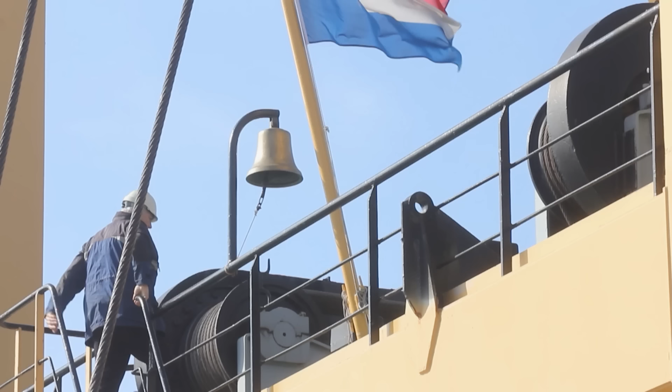Before the van Seumeren brothers could make their bid for the lucrative contract, salvage giant Smit made an offer that President Vladimir Putin could not refuse. Kees van Essen was commercial director at the time. Putin made one promise. I will take the bodies back home before Christmas. So that was the moment to attack. When I came the first time in Russia by Spassky, Spassky told me, sorry Frans, you are too late, because we want to give the job to this consortium.

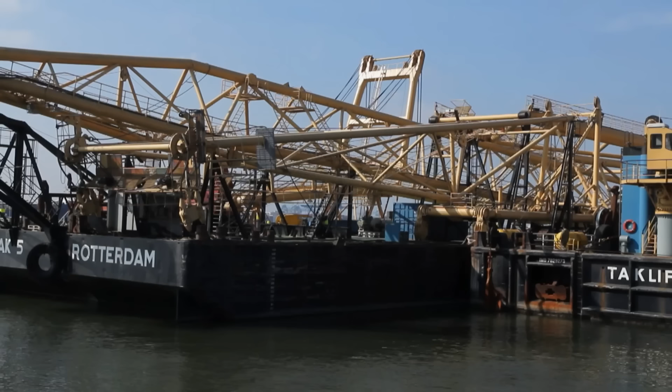This is Rotterdam, the world's largest port city. It is home to Mammoet Heavy Lift Company, at the time owned by the van Seumeren brothers, and to their competitor Smit Salvage, a Dutch ship salvage company. Smit was a step ahead in winning the bid. 10 years before, the Komsomolets went down. That was also a nuclear-powered submarine from the Russian Navy. And our plan was approved, but unfortunately, when that was approved, the Soviet Union collapses. We had a different setup and there was no more budget.

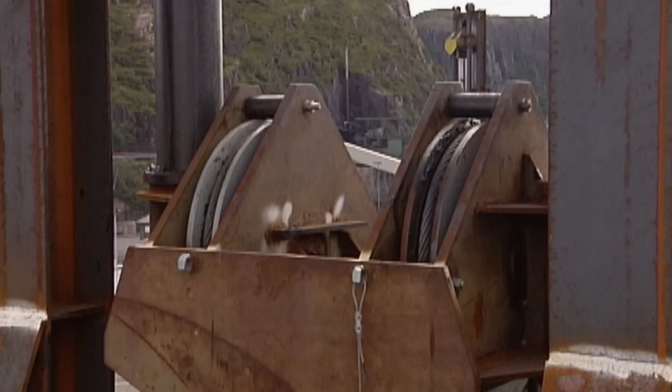The Kursk presented special problems for a salvage operation, and Smit had solutions. The major issue was that the Russians want to have the torpedo room to be cut off. That's where all the trouble started. There was an explosion and it was a big mess down there. It was a nuclear-powered submarine, so they wanted to avoid all possibilities for any vibration in the submarine, because that could have started up the nuclear power plant again without cooling water, and then seriously it could have ended as another Chernobyl. Smit had just developed a unique new system for sawing through steel.

Their expertise opened the doors of St. Petersburg's corridors of power. We had our contacts, of course, with the engineering company, Rubin, in St. Petersburg, and also the head engineer down there was Mr. Spassky. He was also still there, so we had our contacts. And because of our planning for the Komsomolets in the past with Heerema, we approached them as well and see if we could make a new combination.

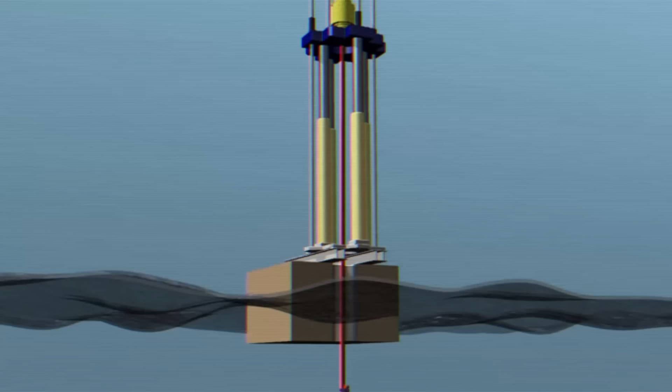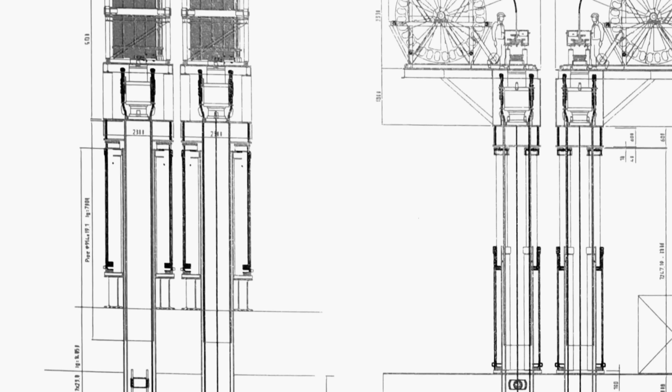Jan van Seumeren, however, had already devised a crucial, unique heave compensation system to handle the Arctic Ocean waves. I got it quickly with those nitrogen cylinders and those reels. I knew how I wanted to do that. And then I went to the pub. It was during the weekend too, and there I was explaining. We often go to the pub together with our staff, and there we were, cozily chatting together. And then we said, well, if we did it that way. And there, I made that sketch.

We had in our operation, our planned operation, 25 work packages, which were all priced as a budget indication. They considered the budget indications as a lump sum, and we could not do this operation on a lump sum basis. Spassky and I, we had directly a good feeling. And also our engineers and their engineers, directly the click was there. Heerema pulled out, leaving us alone with no lifting equipment. We could cut the forward part, we have our divers, we can make the openings, we could construct these grippers, but we had no lifting device.

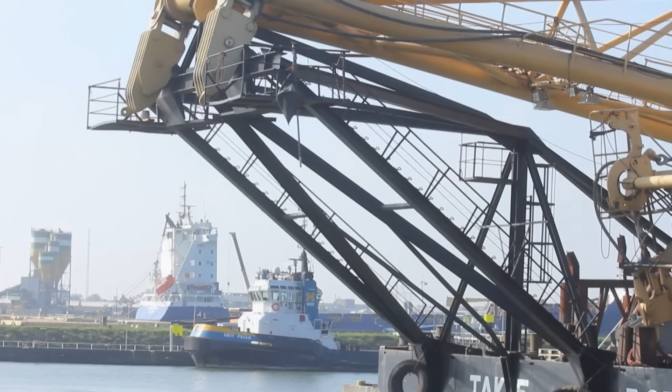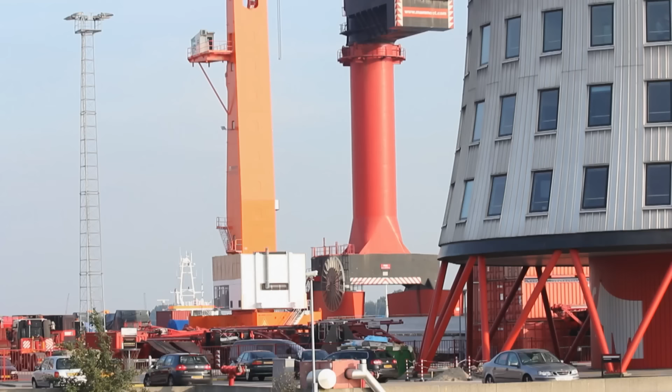When the Smit-led consortium fell through, Igor Spassky called Frans van Seumeren. I said to Spassky, I will come back in 1 week and then I will tell you if we can do the job or we cannot do the job in 2001. It was also the most difficult decision we had to make. We went through the whole program, we talked to the subcontractors, and then we said, we go for it. Frans and Jan van Seumeren were complete outsiders, but found an ally in St. Petersburg.

You must understand that this operation was not just financial, even though the company did make a profit. I never agreed on the price so fast in my life. I thought, less than 50 million, I don't do the job.

We sit down and Spassky said to me, Frans, I got $65 million from the Russian government, and I can offer you 62.5 million. I said, okay, then, merci. And that was the deal.

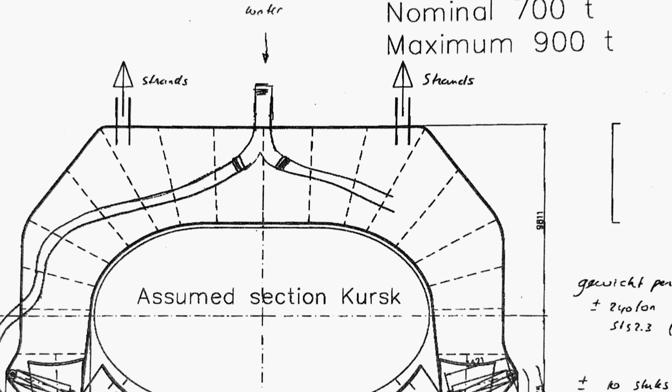That was incredible. You've got the system in your head, and then you need to actually execute it. You know it can work this way. But how do you get that plug into that hole? And how do I make that hole in there? And what's forming an obstruction underneath that hole?

So you've got a lot of problems you need to solve. But all those solutions needed to be invented in just a few months, and that meant that we needed to rush.

The total lump sum was in escrow on the bank, with 60 milestones, and every time we did a part of the work, we made an act undersigned by Barskov, by Spassky and myself. With this act I went to the bank, and so they paid us.

Vitaly Fedko is a Russian filmmaker who recorded the salvage of the Kursk submarine from the Russian ships. He came to know Igor Spassky and the Russian naval officers well. The Kursk was the project 949A, or Antey. It was a very powerful submarine to be used to attack American aircraft carriers.

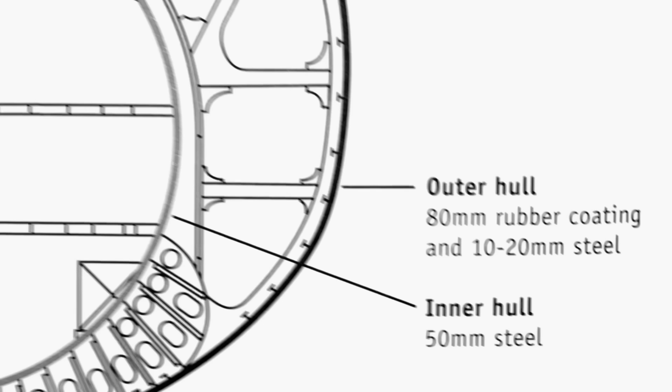The Kursk submarine was the pride of the Russian fleet, the largest attack submarine ever built, designed to stay underwater for months. It was built of special steel with a rubber coating, making it stealthy and fast. It was armed with cruise missiles, a terrifying threat to the navies of NATO. It was based in the Arctic port of Murmansk.

On August 12, 2000, the Kursk successfully launched a dummy torpedo during a massive Russian naval exercise in the Barents Sea. Its captain told fleet headquarters that he would launch one more when 2 large explosions were recorded. The second was estimated to be the equivalent of 2 tons of TNT.

Vladimir Putin refused international offers of help and eventually had to admit the entire crew had perished. Angry members of the submariners' families challenged the Russian government, which tried swiftly to quiet criticism. It was a political catastrophe.

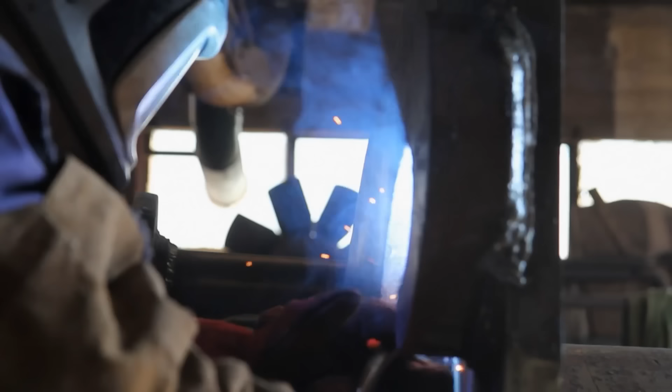The Russians awarded the contract for raising the nuclear-powered submarine Kursk from the bottom of the Barents Sea to the Dutch heavy lift company Mammoet. Mammoet had already approached the Russian Navy with their solutions while we were negotiating, and they performed very well on a stadium, lifting the roof of a stadium with their lifting devices.

So when we had to quit for the time being, they jumped on the bandwagon and they were contracted on a lump sum basis. And then we offered our services, what we had already prepared, to Mammoet. And that's the reason why we did it together.

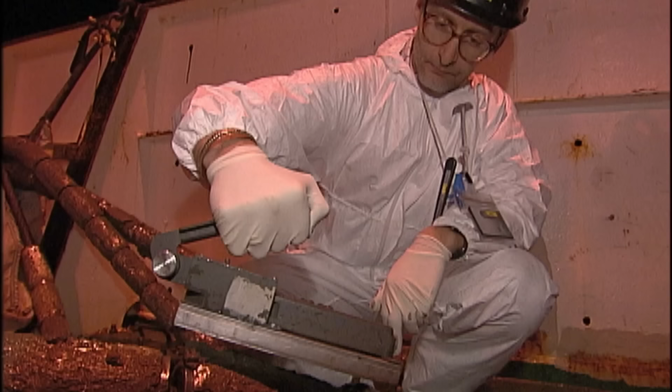The project was complex, with the hostile Arctic environment, torpedoes and nuclear reactors on board, increasing the risks. There were 2 nuclear reactors on board, and they were cut off. And Spassky said they are cut off, there's no nuclear danger. He said to Spassky, we want to hire English Navy nuclear experts to check if everything is in order. In the end, he said, okay, I accept it.

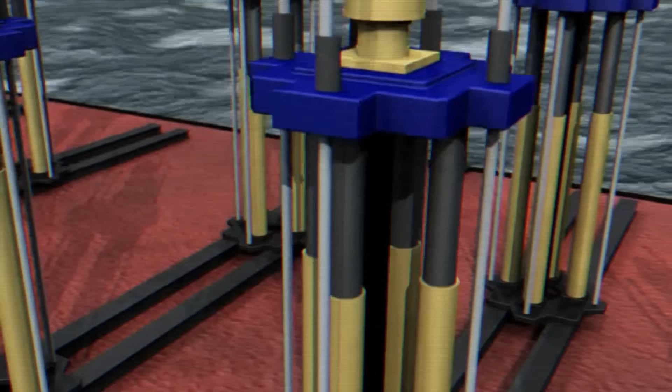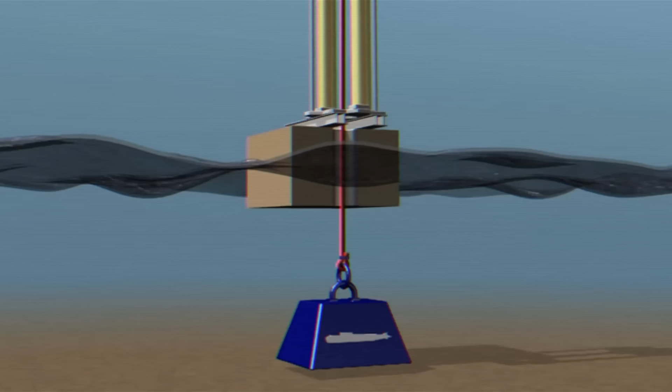The plan involved lifting the submarine from the bottom of the sea using over 24 strand jacks. These are hydraulic pulleys that work slowly so as to avoid sudden tension in the lifting cable. There would need to be a system to compensate for the massive heave of the waves to keep the submarine stable.

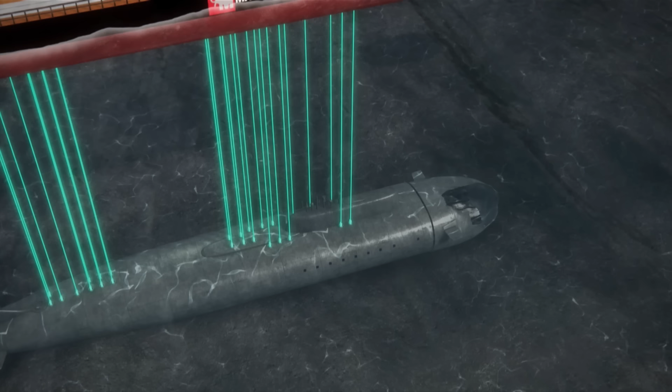Heavy lift is Mammoet's speciality. Strand jacks are its staple. But a project on this scale had never been tried before.

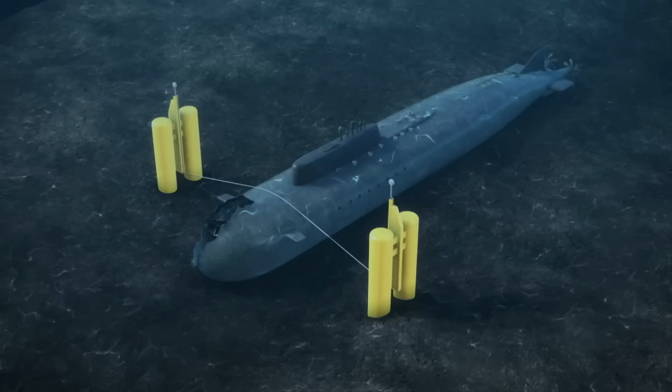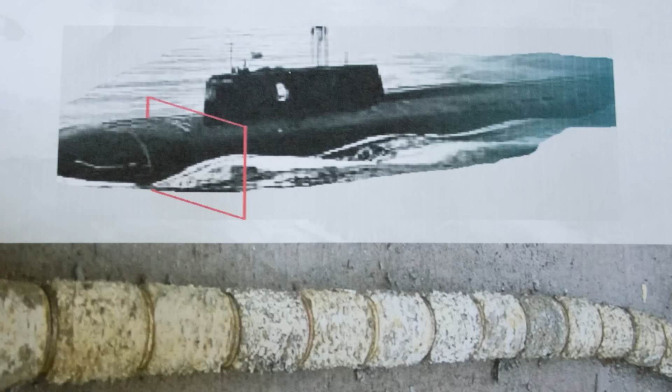Smit would use a revolutionary abrasive cutting system to remove the submarine's torpedo compartment. That was a fundamental condition in the contract. Theo Haak was the Smit R&D engineer who developed the cutting wire in record time, but it was still untested.

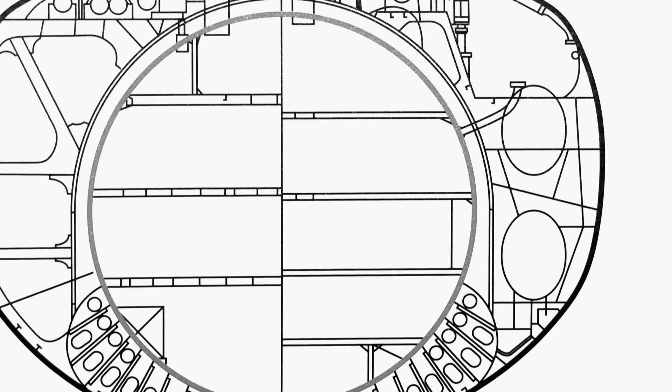The cutting wire is a very simple system. You bring a force onto a wire, back and forth, but you must find the right particles for the bushings. During testing we found out that wolfram carbide was the most effective for cutting the ship's structure. Two large vacuum anchors used negative pressure to dig themselves deeper into the sea floor as a hydraulic pulley activated the cutting wires, keeping them at 20 degrees to the steel for maximum abrasion.

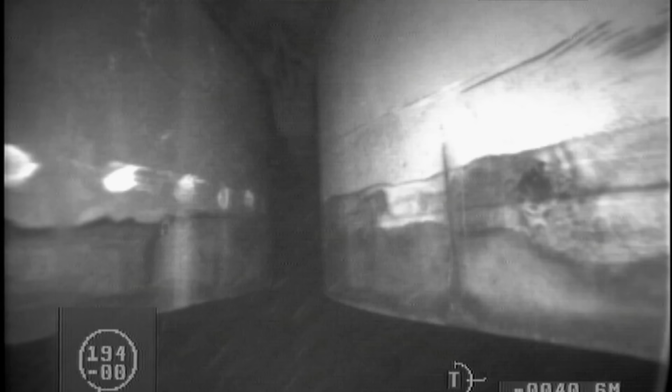Cutting from the top downwards kept the Kursk fixed to the sea floor, avoiding dangerous vibrations. The key to cutting through the tough steel casing was a chain covered in highly abrasive cylinders, known as bushings.

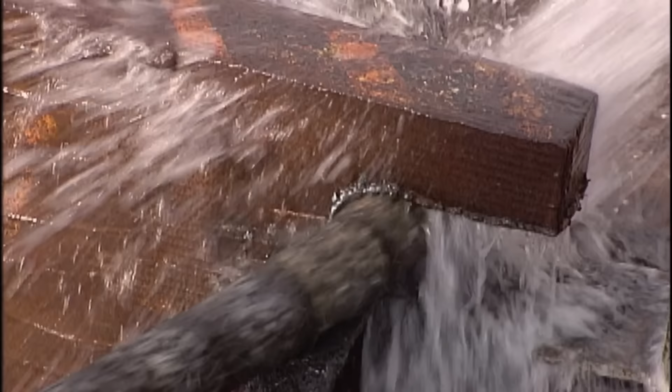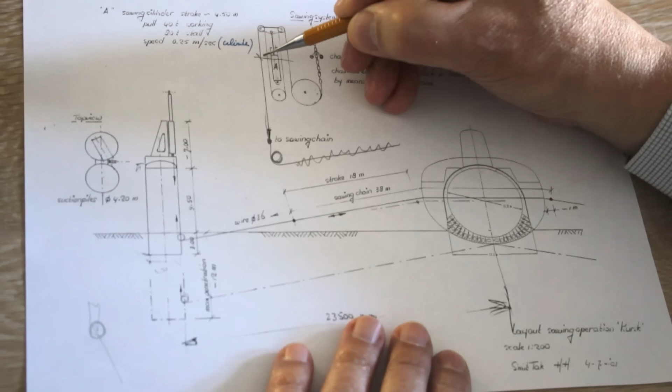This is the drive system. Here you have the cylinder and here you have the drive wire. The cylinder has a speed of 0.25 meters per second, and that you can multiply because you have 4 lines - 1, 2, 3, 4. Then you have 1 meter per second speed here.

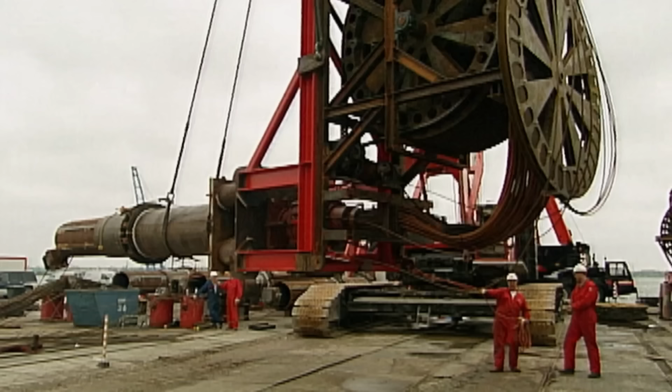The Mammoet team focused on actually raising the submarine using strandjacks, the incredibly powerful hydraulic pulleys that use tiny motions to pull up cables. But those cables would have to be housed somewhere. Mammoet engineers began designing giant spools for the cables to be wound onto.

Mammoet chose the largest lifting barge on the seas of the time, the Smit-owned Giant 4 barge. It would host the strandjack towers, cable spools, and the salvage workers getting the massive machines ready for the historic undersea job. We had scheduled to use our giant barge as an upside-down cradle where we would lift the vessel through the barge and then fix it to the cradle and bring it under the giant barge into Murmansk.

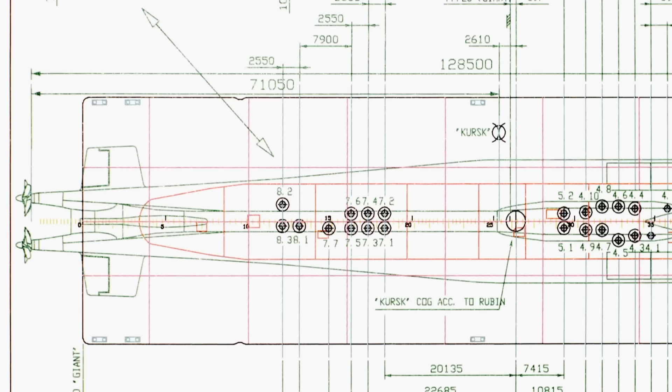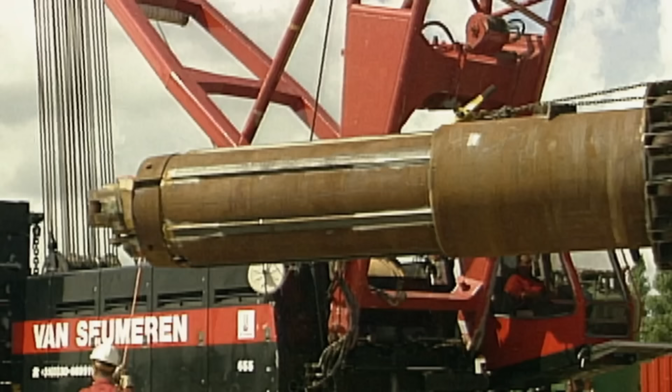Russian engineers had provided the Dutch team with the precise layout of the Kursk submarine and indicated where holes could be cut to insert the grippers. This plan had to be accurately reproduced on the Giant 4's deck, indicating where to make holes in the hull to pass the cables through.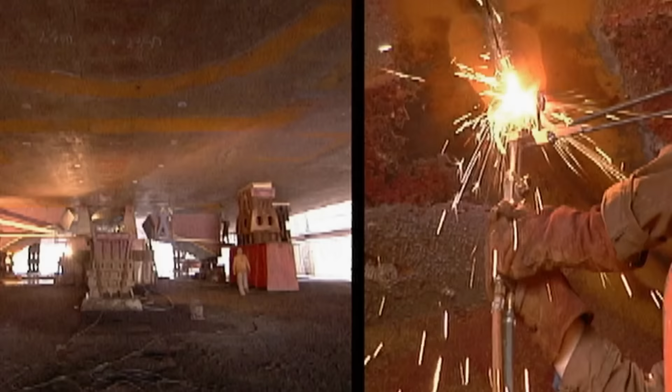The lifting towers and heave compensation system were placed directly above them, while a space was made under the barge for the submarine's conning tower. A saddle was built to hold her in place.

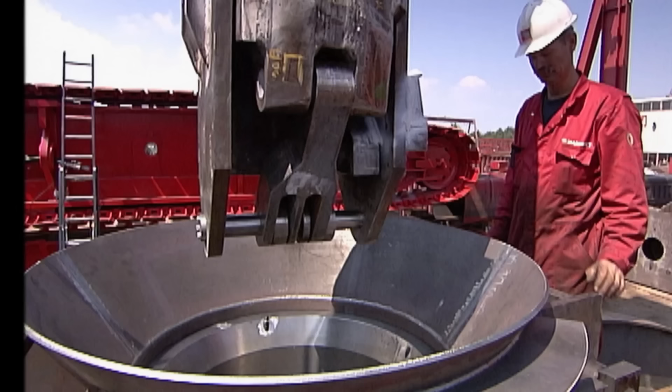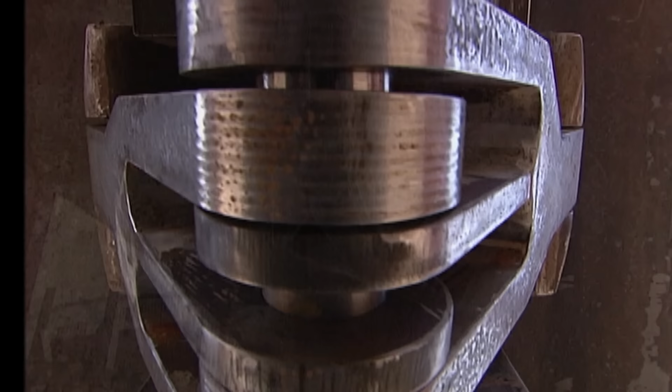Mammoet engineers now had to design the giant grippers to actually insert into the submarine's hull for lifting. The grippers would open only once inside the hull. Russian engineers came to check on progress.

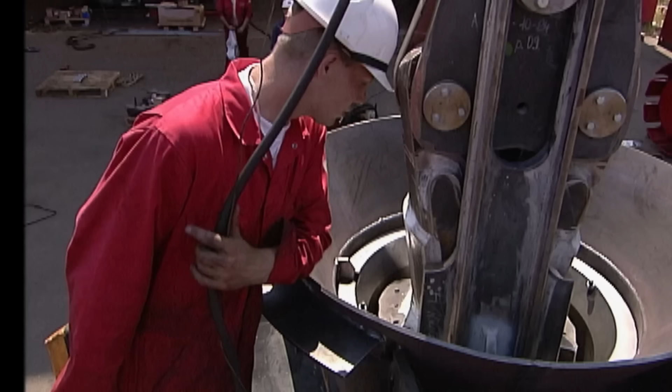The grippers would have to be guided into the submarine by tubes specially designed to fit a specific hole in the vessel's hull.

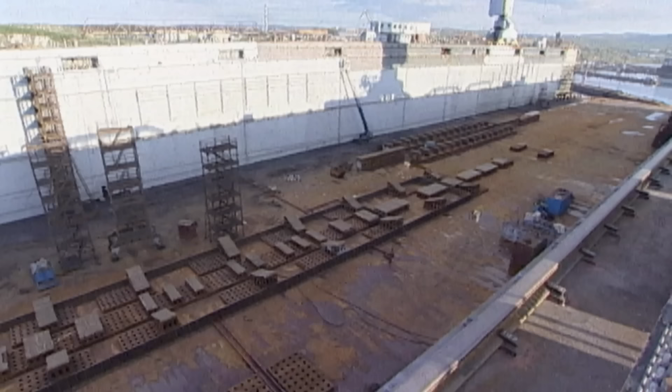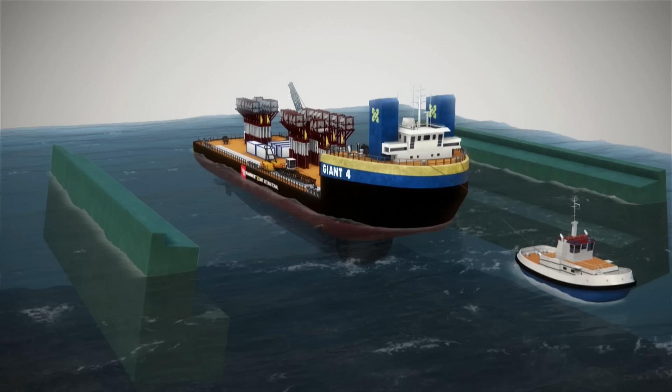The Dutch side of the operation was underway, but salvage masters now had to devise how the Kursk would be towed into the dry dock of Murmansk. The combined draft of the barge and submarine together was too deep to enter the shallower dry dock. Russian and Dutch engineers decided to build 2 special pontoons that would raise the Giant 4 by 16 meters, with the Kursk slung underneath it.

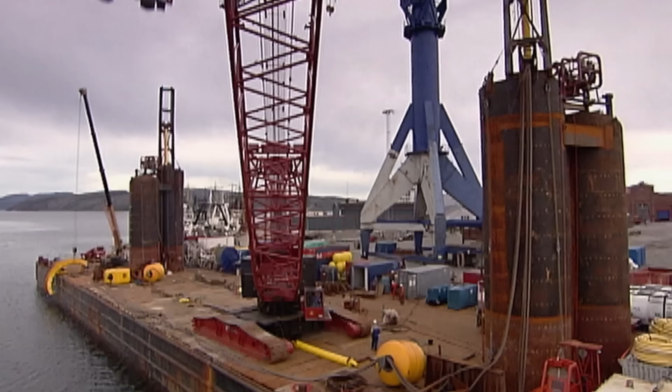In June 2001, the ATM pontoon carrying the Smit cutting system sailed to Kirkenes in Norway for testing. It was the moment of truth. All the components were sent to Kirkenes, and there we assembled all the system. And there also the actual testing took place.

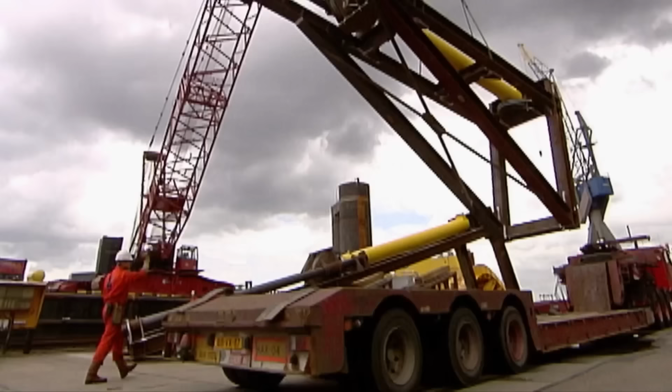During that testing a lot of problems occurred. We had problems with the hydraulics, we had problems with the computers, and also with the saw bushing itself. The steel abrasive bushings were proving inefficient, so Theo Haag ordered them sent back to Rotterdam by truck. All the bushings were sent back by truck to Holland, and within a week it was back, and testing started again.

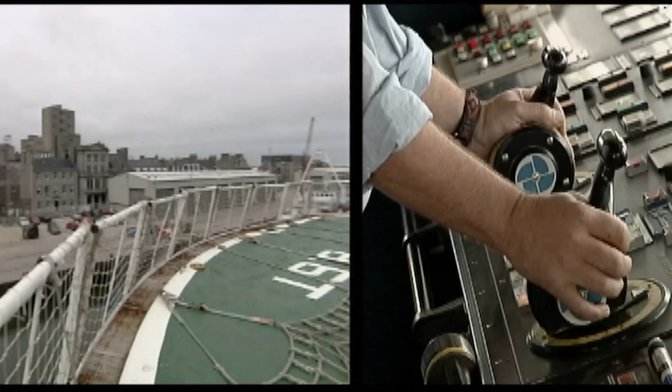In the meantime, Frans van Seumeren hired the Norwegian diving ship Mayo to host the divers, who were crucial to the success of the operation. You can rent a diving ship, let's say, per day. I tried to get them into a kind of a lump sum, but they didn't want to do that. But at the end, they did a perfect job, and it was a good decision.

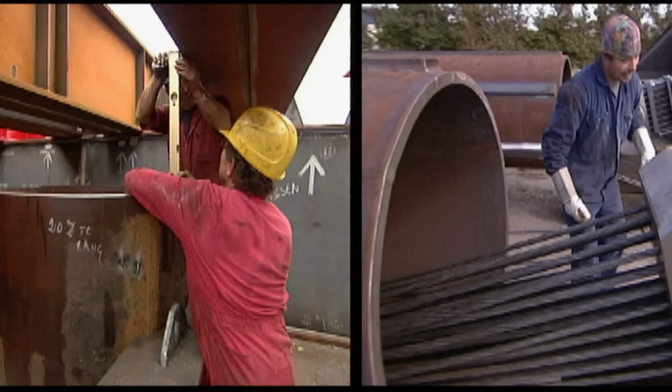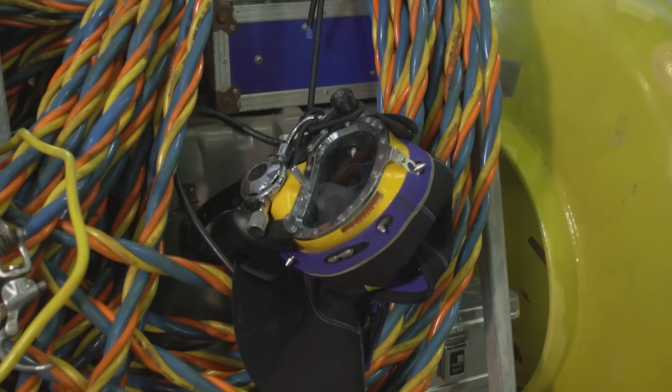While the Giant 4 was being completed, divers were already on the wreck, cutting holes with millimetric precision in the locations indicated by the Russian technicians. Each diver wore a heated dive suit, and was supplied with camera and microphone to communicate with operators above the surface. Aboard the Mayo, technicians gave instructions to the divers as to where to cut.

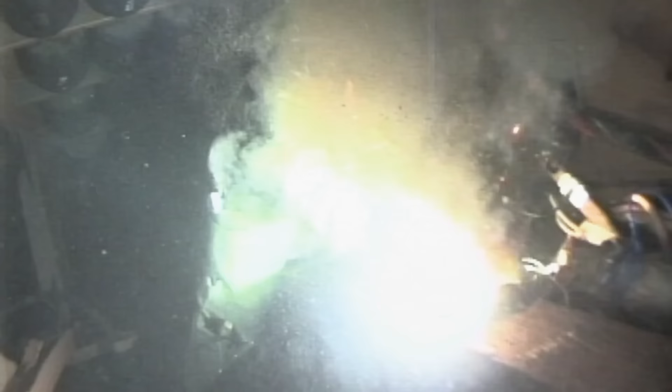Chris Boss was one of only 4 Smit divers on the project. I was there for my expertise in underwater cutting, because we had to install 26 of those grippers on the inner hull. That means that we had to open up the outer hull and clear everything out of the way, so that we could cut a hole for the grippers.

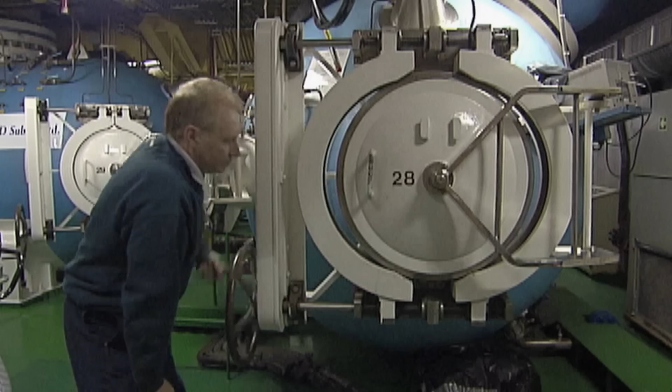The eerie sight of the Kursk's conning tower was a somber reminder to divers of the tragedy that had befallen the 118 submariners. They worked in freezing water and were kept at sub-sea pressure while off-duty too. As the days went by, the operation continued to get more risky.

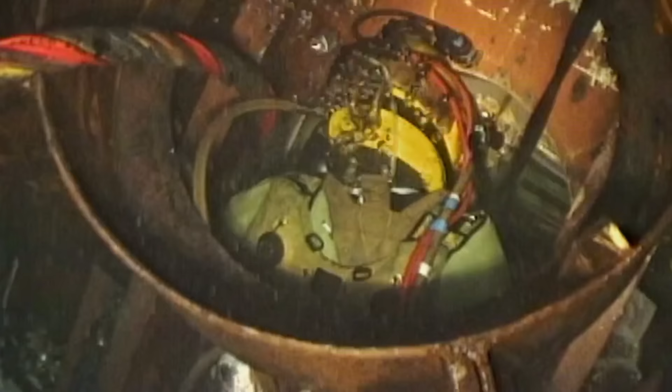It was dark and cold at 100 meters under the Arctic Sea, where divers began cutting holes in the steel hull of the Kursk submarine for the grippers that would lift her.

It would take a total of 26 grueling days, working in shifts of 3. You are under pressure all the time. You live in a pressurized system on board, and the transport from the vessel to the job site is via a diving bell.

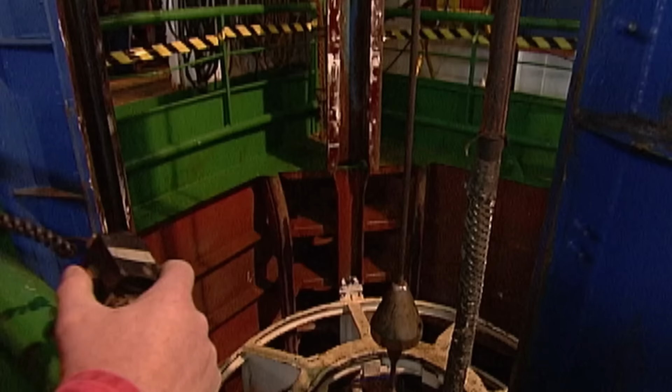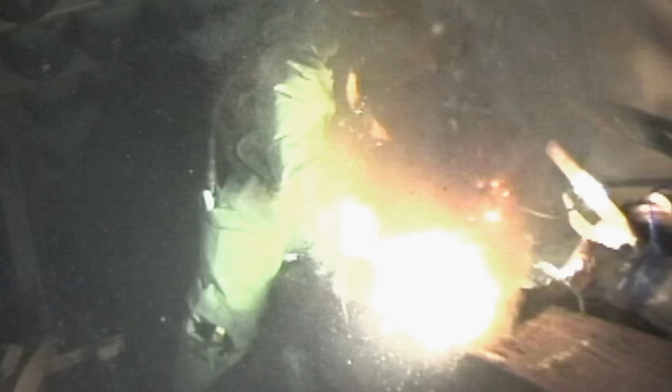Those bells on the Mayo, we had a 2 bell system, so 3 persons in 1 bell, 2 divers and 1 standby diver. You just get tapped on the shoulder like you do on a normal job. From time for you to go, the next one will take over, so you don't lose any time. Divers used a special compressed water and sand cutter to slice through the solid steel.

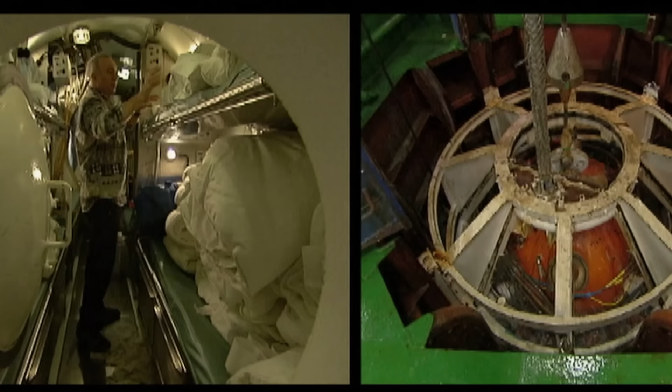Well, I think a prison is a better place to be, because there you have some space to walk around. It's very, very tight, and you live with 4 or 6 guys in a very small chamber. Usually they try to manage it so that when you're not asleep, your other team is working, so that you have some space to walk around if you have to eat or shower or whatever you want to do. The teams were totally interdependent, and given their cramped living conditions, they had to get along well.

We work for 6 hours straight. Then you're allowed to go back to the bell for a little water or a little lunch or something to eat. But basically, as soon as you are out of the bell, it's work. They don't allow you to sit or relax for a few minutes or so. It's always production, production, production.

By early September, all the holes had been cut in the Kursk's hull, and a second group of divers arrived to install the suction anchors and the cutting system to remove the torpedo section. The Arctic summer was drawing to a close.

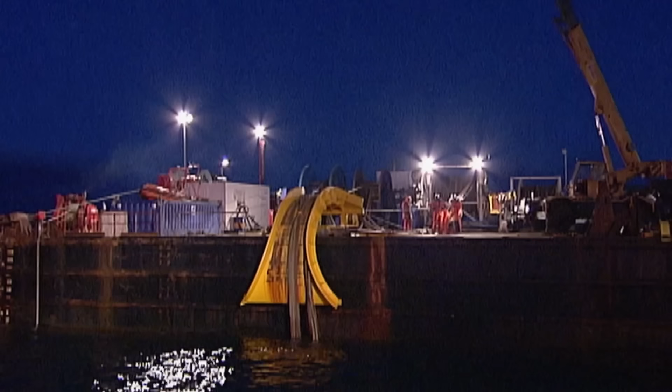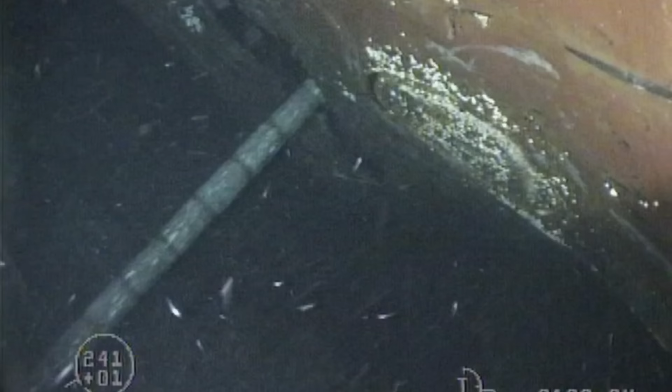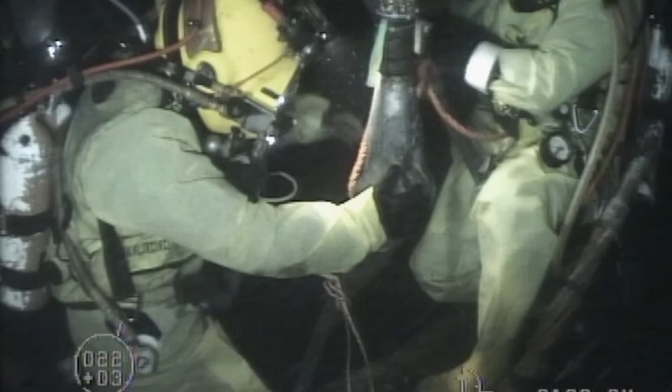The first few runs went well, but as the vacuum anchors dug into the seabed, the driving cable that connected the hydraulic pulley system to the sawing wire got snagged in a guide sheath and snapped. The anchors had to be taken out, repaired and re-sunk, costing the project precious time. The same problem arose 3 times.

We're losing already a lot of time with the testing in Kirkenes, and at the moment when we start cutting, we don't have so much time because the winter season starts. So every delay was critical.

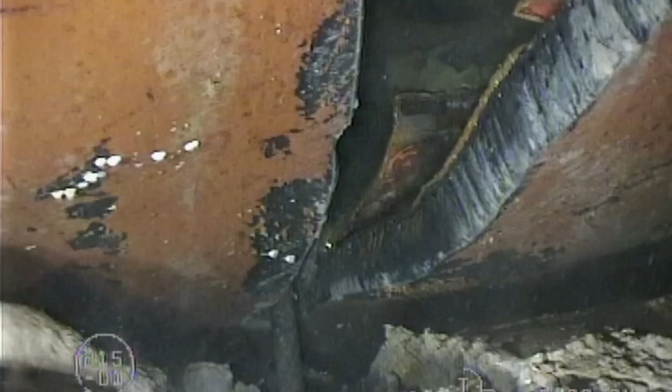By the time the Smit engineers could say the nose had been cut off, the Russians were worrying that their operation was running too late. With the biggest payment at stake, and with the October gales round the corner, the salvage deal nearly fell apart.

I went to Spassky at the Barents Sea job site to sign the act because we had cut off the nose. And then he said, Frans, I don't sign. And I thought, oh my God. And we were later, of course, in the season.

I think now the old fox is trying to make difficulties. He said, no, the nose is not cut off, not completely. But it is very difficult to convince the Russian that the wire is through the steel. And we do some calculations and we say, yeah, we have cut the nose.

I said, but Spassky, my people are really saying that it is cut off. He said, Frans, it's not cut off. And we had hard arguments. It was cut. It was not cut.

What could we do? So we accepted a certain risk. And then he said, Frans, I sign it. He said, you can go to the bank. I signed the act. But I tell you, the nose is not cut off. He was right.

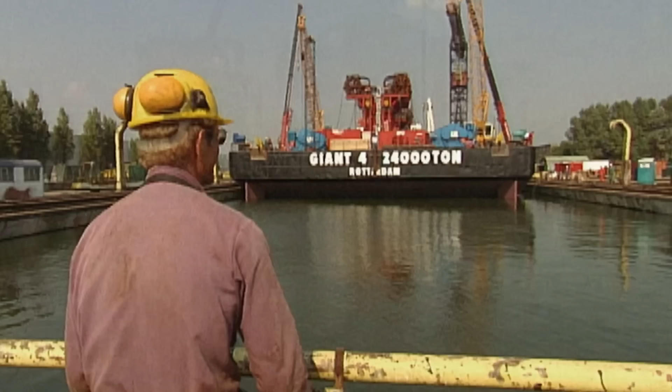The October storm clouds were gathering, and the Arctic winter threatened to make recovery impossible. The last stage of the salvage began.

At the end of September, the Giant 4 sailed from Kirkenes in Norway to the Barents Sea, and finally arrived at its anchoring location right above the sunken Kursk.

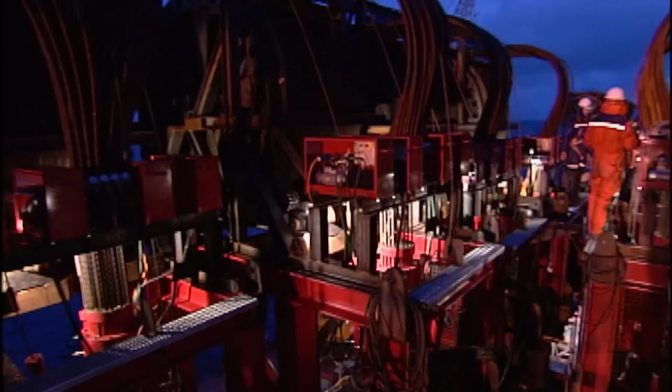It took an entire day to position the Giant 4 precisely over the Kursk using ROV underwater cameras. The weather was turning bad just as the barge was being positioned, and the engineers on board were preparing the heave compensation mechanism. Workers acted swiftly and efficiently to get things done in the brief windows of good weather.

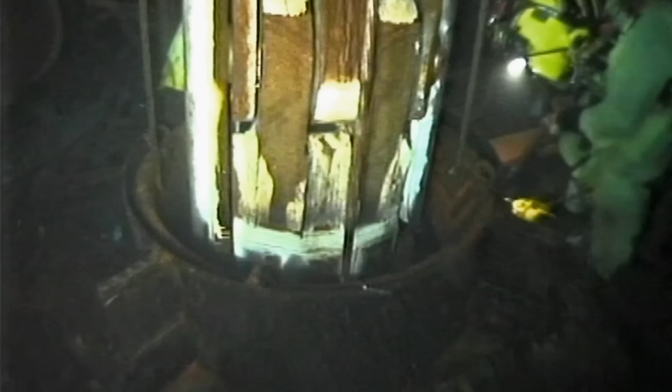We had to install the plugs, the grippers. The first 3 took so much time that I thought, oh yeah, we will end up in half November.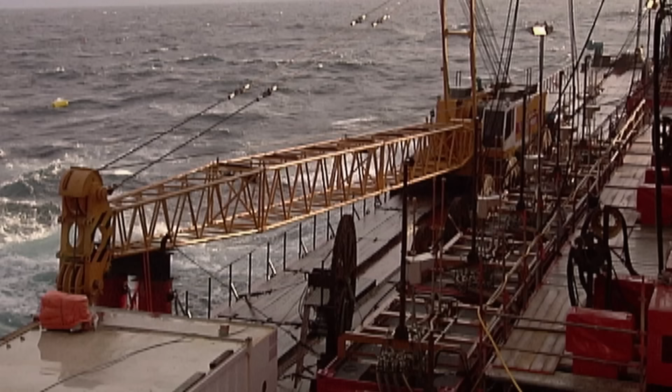Worse was to come. The winter storms approached just as the first grippers were being installed. At one side, it nearly went underwater, then on the other side, so it moved back and forth. We were about 8 meters high, so we were 7 meters above the water surface, and its width is 36 meters. The heave mechanisms compensated for the 8-meter-high waves, but could not handle anything higher.

One time I tried to talk to Spassky and said, Spassky, what are we going to do when we are too late, when the season is over and the weather is too bad to do the job? Could not talk about it.

There was still a danger that the cables already attached to the Kursk would snap in the powerful, stormy seas. We were in the middle of the barge, and obviously we don't have that high heave, so with the bad weather, we loosened everything. There was no tension left on the cables.

Despite the weather, the team decided to proceed. The point of no return had passed. The job had to be done.

Meanwhile, back in the Netherlands, Jan van Seumeren's wife, Ma, had no news from the Arctic Sea. She prayed daily, although deep down she believed Jan would ultimately succeed.

Then he said to me, Mar, I need 2 days of good weather. 2 days. And then he looked up and said, and I know I'm going to get it. I've done so much in my life, but this job is so important. So much is involved in this. So many people are involved. I'll be given some help. I feel it. And on that documentary, you can see it.

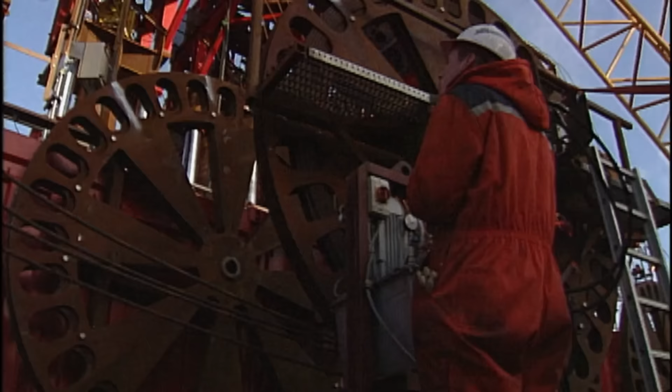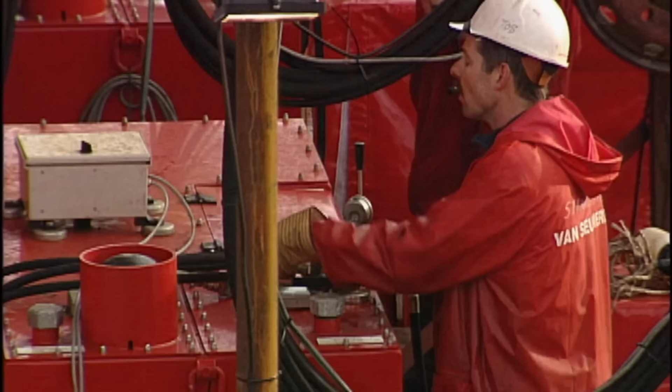Once the worst winter storm of that October had passed, the grippers could be installed. With the much-needed break in the weather, the pace of work increased, and 6 grippers were installed daily.

And then really the grippers, there was a learning curve, you know. After the 4th, 5th, within 2-3 days, the grippers were installed.

The Kursk was lying in the mud and was stuck there. So it was very important for the engineers to calculate the forces that the cables and all the other equipment could withstand, because at first, as the submarine was being detached from the seafloor, there was a suction effect.

Someone suggested we move it a little first, to detach it from the seafloor. I thought we ought to move it more drastically from left to right. That night, I went on the deck of the barge with its 26 grippers installed, thinking about what we could do, and a slight wind began blowing, and I saw bubbles in the sea as the barge began rocking from left to right. I was stunned, and despite everything, I began to believe in God.

The Russians knew that there would be no storms that weekend, so they planned to raise the Kursk on Saturday or Sunday. I remember that the weather was ideal and there was a full moon.

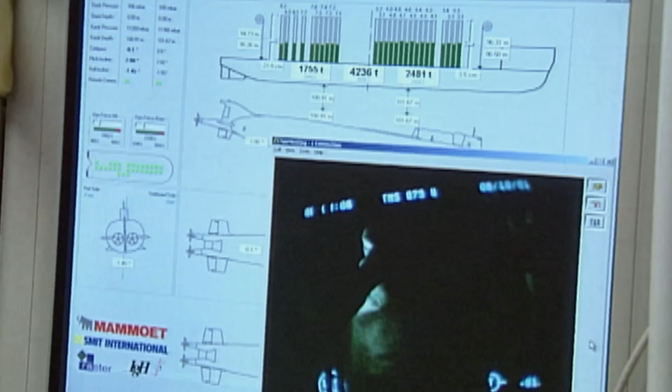Finally, on the night of the 7th of October, the Kursk was ready to be raised. Tension filled the air as the historic moment drew near. Stand by, we are starting to lift.

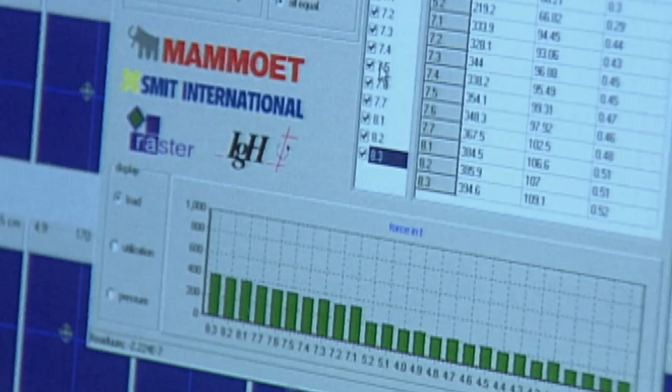We gave the go-ahead to lifting, but we were very doubtful as to whether it was the right choice.

And then, as they were lifting, the nose section fell off. Or maybe it had been detached by the explosion. In any case, it fell off. So we were quite lucky.

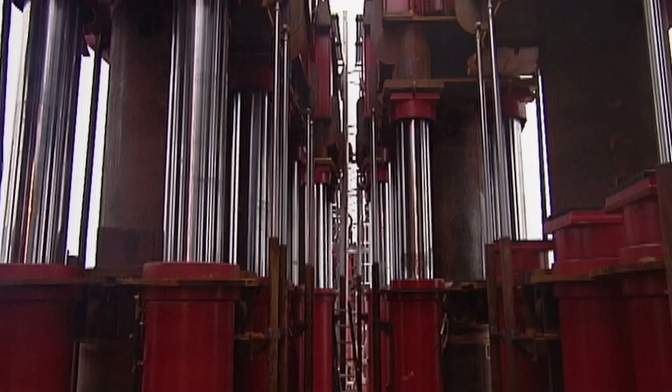The strand jacks creaked and pulled at full speed. 15 hours later, the Soviet-era submarine had been hoisted from the bottom of the sea.

The Russian engineers and mariners watched the ROV images with bated breath.

Everyone cheered, success, success, and there was an explosion of emotion. Why so much emotion? Because no one was fully convinced that they would pull it out.

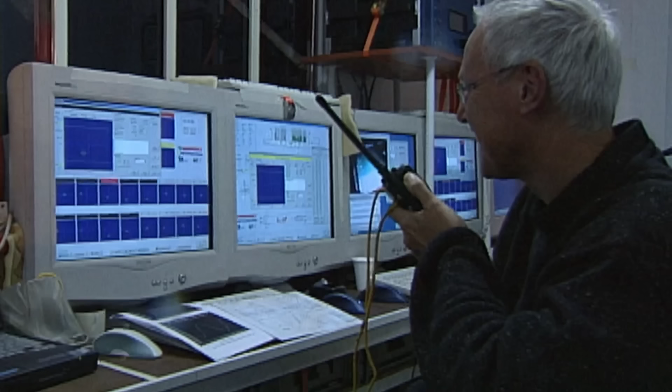Finally, at 7 p.m. on the next day, the ship's captain ordered the anchors raised and turned the barge into the wind. The successful 15-hour operation was a bittersweet triumph.

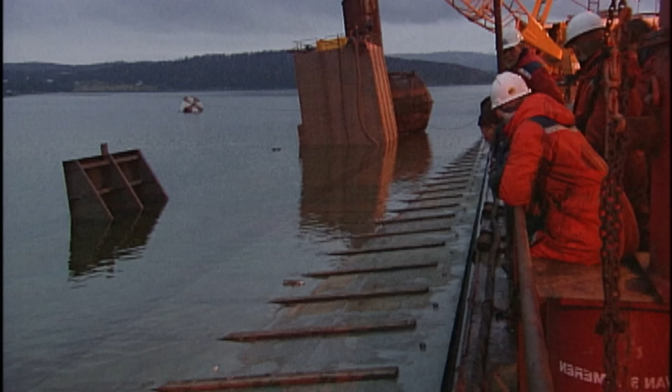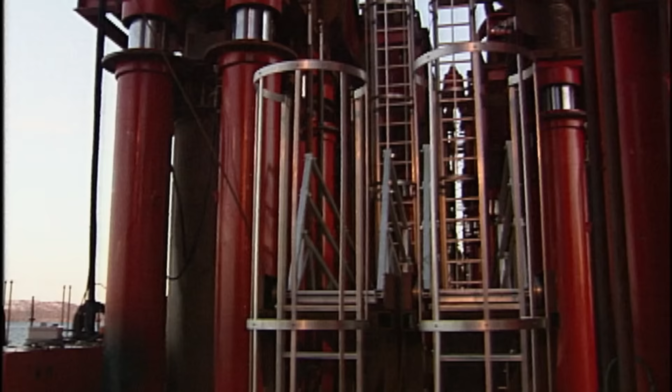The Giant 4 barge with its 24 lifting towers had successfully raised the Kursk submarine from the bottom of the Barents Sea. The enormous barge was now on its way back to Murmansk with its precious cargo, a nuclear-powered Soviet submarine slung underneath.

The two semi-submersible pontoons, named after Gon and Ma, the wives of Franz and Jan, crossed the path of the Giant on the 10th of October 2001. The two pontoons were tugged up to the sides of the Giant 4. They acted as massive ballast tanks to be sunk and then slipped under the barge. Once refloated, they would lift the barge and submarine combination out of the water, so it could enter the shallow Russian dry dock.

This entirely new phase of the operation proved one of the most complex, as the pontoons had a design flaw. Gon and Ma were found to be unstable, and Russian divers had to add extra ballast to keep them upright as they sank.

Just like the Titanic, the upper bulkheads hadn't been fully welded, so there was an opening. So that was simply a construction error, so there was an overflow, and that's why they sank. We solved the problem by adding something to it, and by doing things differently. But that was the mistake, simply a construction error.

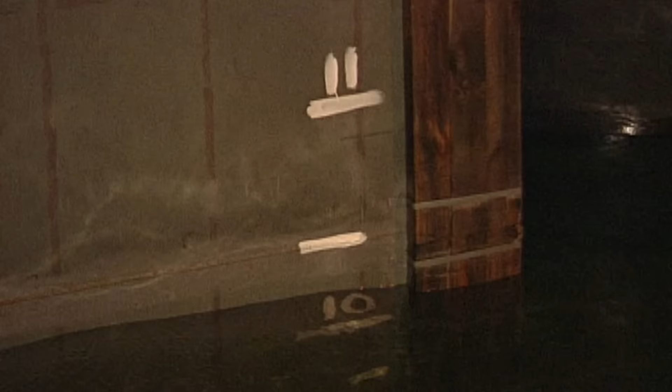The pontoons lifted the Giant and the precious cargo slung under it by 16 meters, so that together they were high enough out of the water to enter the dry dock of Murmansk. On October the 22nd, 2001, the grippers were slowly released, and the Kursk lay on the bottom of the Russian-built dock.

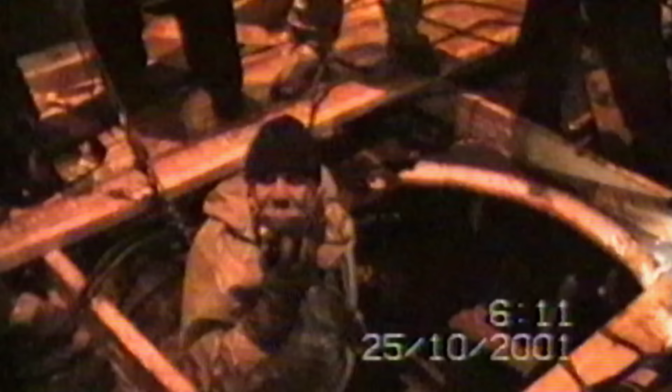The Giant could be tugged away, but not before Captain Pete Sinker and the crew cast a wreath of flowers to salute the fallen submariners still trapped in the Kursk. It was an emotional farewell. Shortly after the Dutch mariners had left, the time came for the Russian Navy to extract the bodies and find out what had happened to the pride of their fleet.

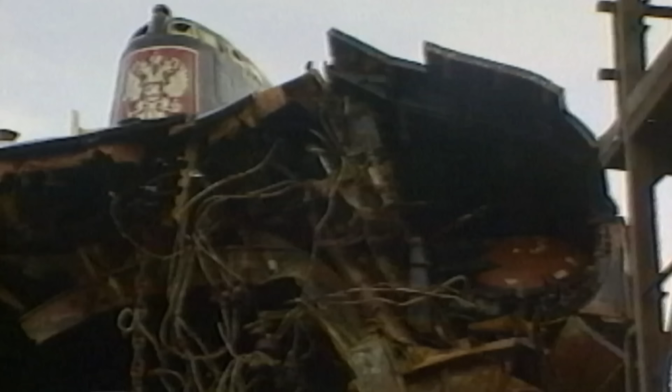A mysterious round hole was present on the part of the hull that the Dutch saw chain had not removed. Officers examined the gaping torpedo room once all the twisted debris had been removed. Many different theories began to take shape. Was it hit by an American sub, also in the area? Was the Kursk struck by a torpedo? Did one of its own torpedoes malfunction and explode? The secret, stealthy submarine was thoroughly examined by Russian Navy investigators. But what sank the Kursk would remain cloaked in controversy and mystery.

The victims' families were left with just the memories of their sons, husbands, brothers, and fathers. The men were honored with a somber religious ceremony in a mass funeral attended by respectful citizens of the port of Murmansk.